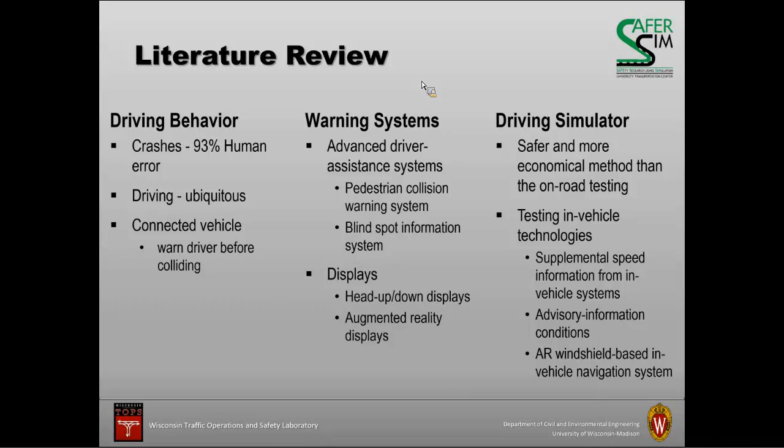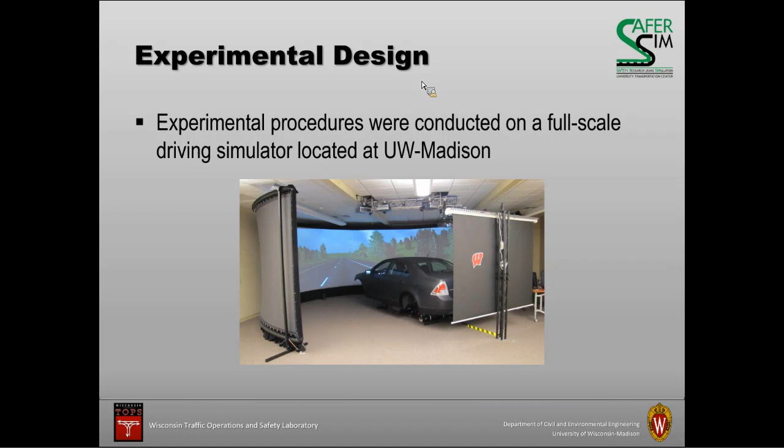So I will move now towards our experiment, how we conducted it and what kind of things we did. First of all, for our project, we used our full-scale state-of-the-art Ford Fusion driving simulator. It's located at UW-Madison, as you can see in this picture. The scenario that we created involved rural cross-sections, followed by urban cross-sections.

The driving was conducted in the simulator, and we emulated normal weather conditions. So it was day driving, good visibility, no rain, and we didn't include any snow. The rural portion of the drive was 2.3 miles long, and the urban portion was 2.1 miles long.

So the figures on the left show typical rural roadway cross sections for the experiment, and the figures on the right show the urban roadway cross sections. For the urban roadway cross sections, the speed limit was set to 25 miles per hour.

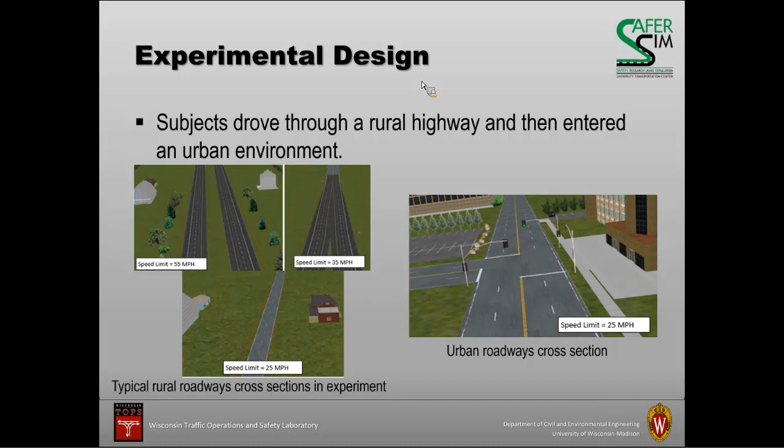To collect subjects' responses, we added this push button, and subjects were asked to press this push button on the steering wheel once they saw a pedestrian or a bicyclist. The responses from the push button were collected using a cell phone connected to the button via a Bluetooth connection. And timing was synchronized with our driving simulator.

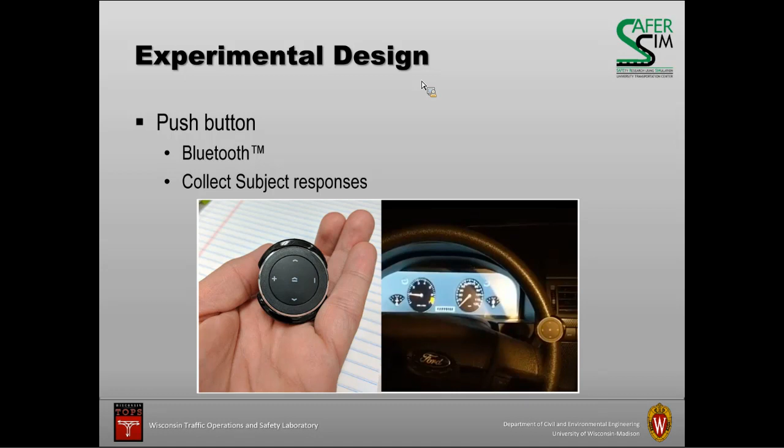Cues about the presence of pedestrians and bicyclists were communicated to the subjects using an in-vehicle warning message and auditory signal. As you can see on the dashboard, we created this visual warning message where it says warning ahead. It flashes for 5 seconds. I don't have the beep sound, but imagine that you're seeing this warning message and hearing the beep at the same time.

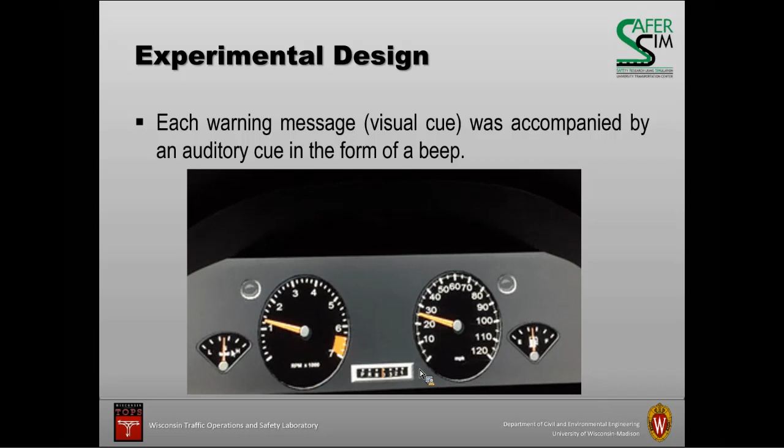So cues about the presence of pedestrians were communicated using this method. While you are driving, the time to arrival to a pedestrian is being calculated. Once this time to arrival is 20, 30, or 40 seconds, predetermined in the scenario we created, the audiovisual cue was triggered. This time to arrival was calculated based on the speed of the vehicle, as we can see one more time.

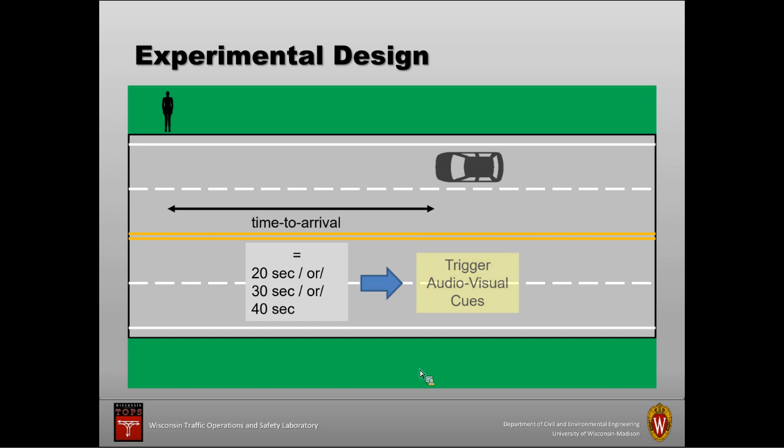So here I'm gonna show you a video from inside the vehicle of what the driver experienced. As you can see, the warning message was triggered, which means that within a specific amount of time we will see a pedestrian, and you can see the pedestrian over here. Once the driver saw the pedestrian, they reacted first by clicking the push button and then by reducing their speed or stopping. It depends on how they were driving.

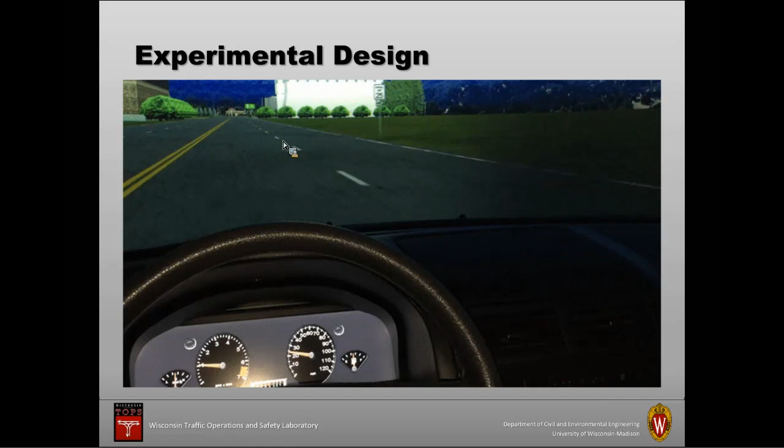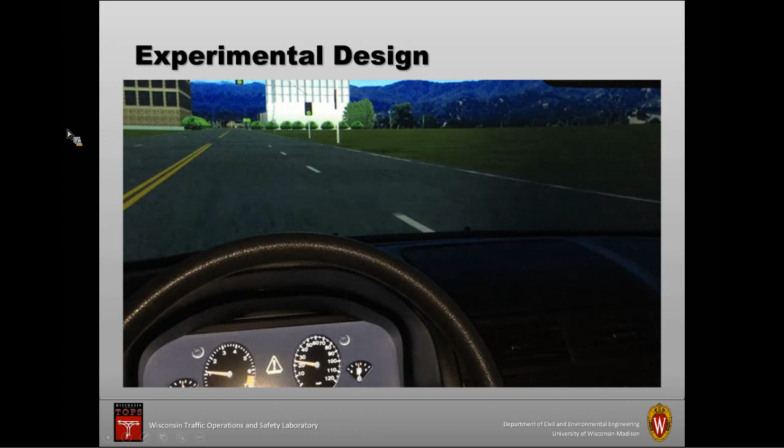So we can see it one more time. And here is our pedestrian. We also added these big signs to let the drivers know in which direction they should drive at intersections.

So how did we split our audiovisual cues and no cues? 50% of the events had no cues, and for the other 50%, the subjects received visual and auditory cues for the presence of a pedestrian or bicyclist. These audiovisual cues were split into 3 different timings: time to arrival of 20, 30, or 40 seconds.

And in the next slides, I'll be referring to time to arrival of 20 seconds as Q1, time to arrival of 30 seconds as Q2, and time to arrival of 40 seconds as

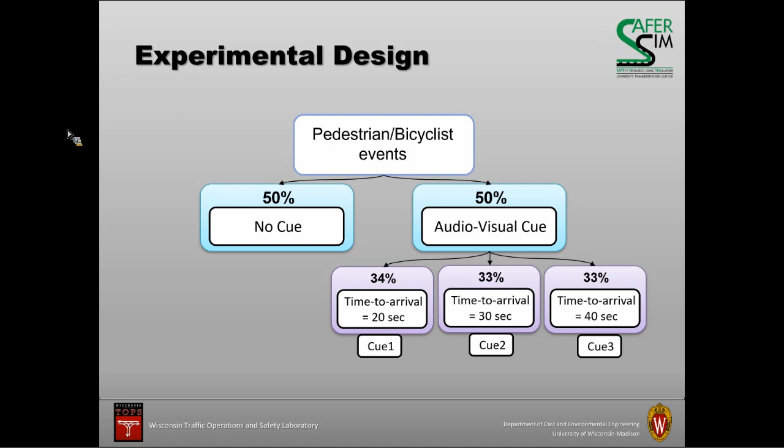15 males and 6 females. We had an average of 30 years old subjects. They were ranging from 21 to 70 years old. The oldest driver had to drop out because of simulation sickness, and we also had a technical malfunction, so we also had to drop out 1 other subject. So in total, we had 19 subjects left. So each subject encountered 7 pedestrian bicyclist events.

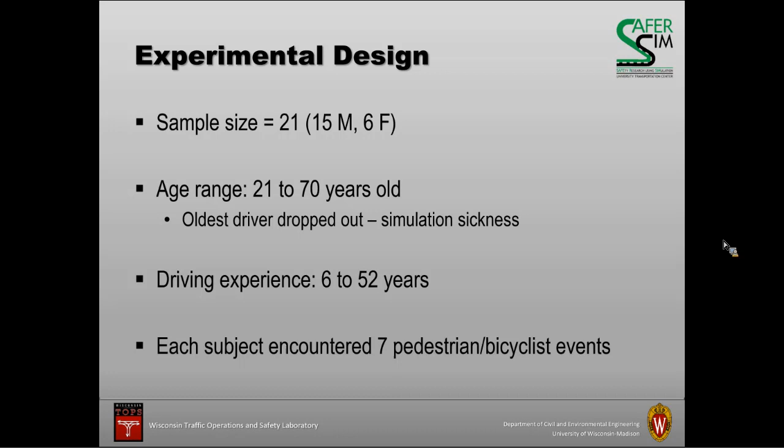So each driver reacted differently to seeing a pedestrian or bicyclist, and these figures show the location of the driver in X and Y coordinates along the road while approaching each of these 7 events. So the first 2 events were bikes, and the rest 5 events, they were pedestrians.

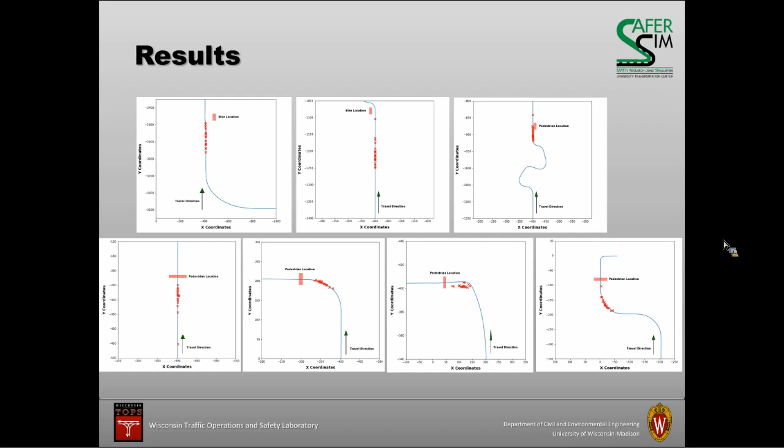So for each subject, data was visually inspected to remove missing performance measures, and this is due usually to subjects not seeing an event, and they usually missed the first event. And after that, we used the median absolute deviation as a statistical filtering method.

So after doing this statistical test, no statistically significant difference was found between the mean distance of groups, meaning there isn't any difference between having no cue or cue at a specific time. So because we didn't have any statistically significant difference, we were able to group all the treatments in one group and conduct an additional analysis.

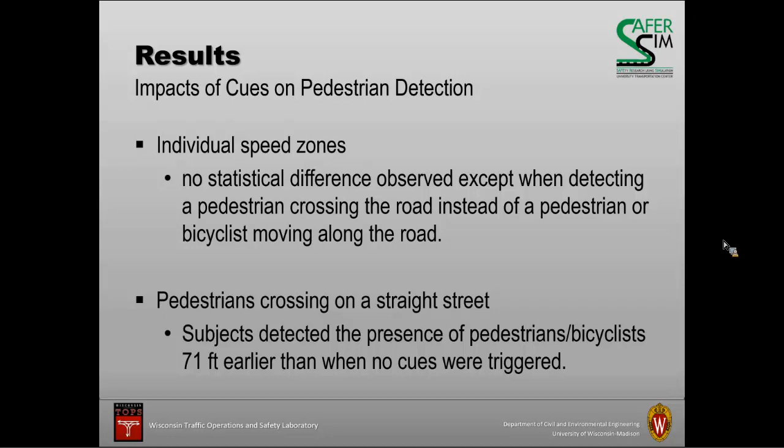Speed profiles were also plotted for each subject. This is an example of speed profiles. So in addition to the driver's speed, we also added the moment an alert was displayed, and this is represented in the blue dots. And every time the driver clicked on the push button when they saw a pedestrian or a bicyclist, it's also shown here with the red dots.

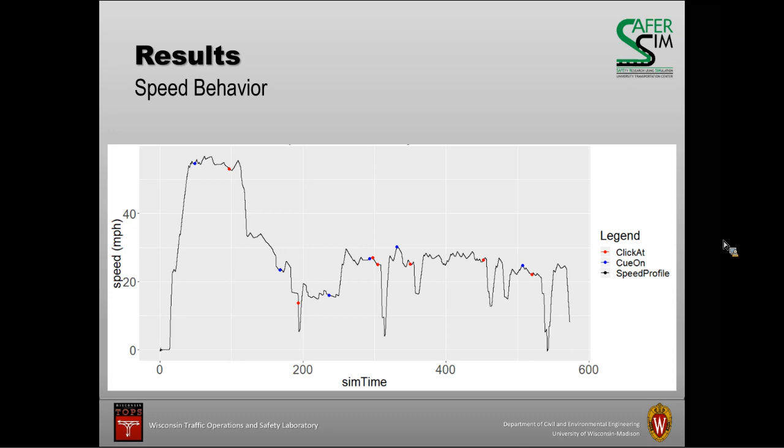So looking at the speed profiles for all of the 19 subjects we had, drivers reduced their speed for 72% of the events after seeing an alert. And on average, they reduced their speed by 5 miles per hour. And they also reduced their speeds below the speed limit, and this gave them more time to travel. And drivers decreased their speed for an average of 14 seconds after receiving a cue.

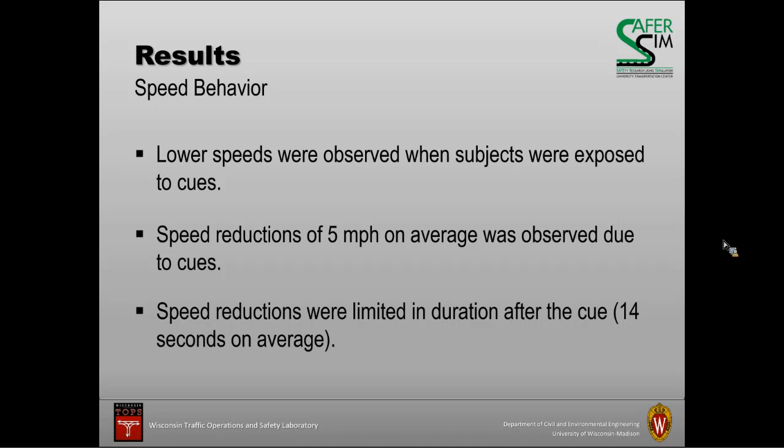Conclusion for this project: we see that the vehicle technology has improved over time and it continues to improve. And as technology continues to evolve and connected vehicle technology becomes ubiquitous, it is conceivable that vehicle sensors will be able to detect the presence of pedestrians and bicyclists and communicate this presence to other vehicles.

From this project, we saw that the distance at which pedestrians and bicyclists were detected by subjects, compared to groups of events associated with cues and no cues, when a cue was triggered, statistical tests suggested that subjects detected the presence of pedestrians 25 feet earlier than when no cues were triggered. And variances in the location where pedestrians are detected were lower when a cue was used. And this suggests that subjects were paying more attention to their surroundings.

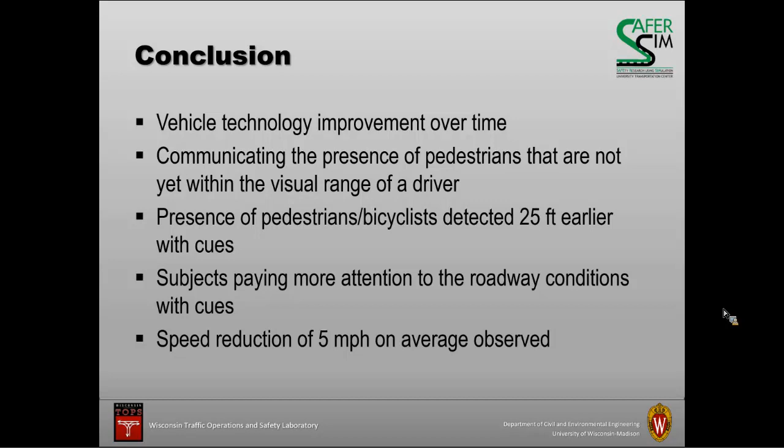And when cues were triggered, for most of the events, we saw a reduction of 5 miles per hour in the speed. Now, as a future work, we had a small sample size per event. So for future work, we would like to focus on expanding the number of observations per event, and a larger sample size could help narrow the potential impact that different cue trigger times have on the detection of unexpected pedestrians and bicyclists.

And the driving simulator itself has a limiting factor because of the complexity of the experiment. So as a future work, we would suggest a lower fidelity experiment to assess the spatial effectiveness of cues on the attention of subjects. And these lower fidelity experiments could be conducted using dynamic surveys that can expose participants to a pre-recorded video scenario via a computer screen.